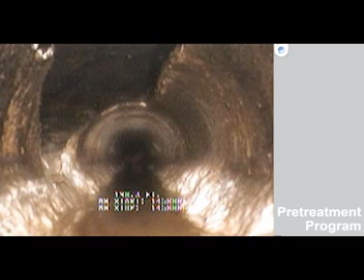In addition, we had a bout with bioslime, and I don't know if anyone on the call has dealt with that, but it's a very interesting thing to try to track down. You can see this slimy goo that is in the sewer pipe, which posed problems throughout the collection system.

I actually worked second shift because I was studying engineering during the day in school, and I drove into the facility one afternoon, and I could not drive past the aeration basins because they had foamed so much and overflowed all of the basins that there was just foam all around. I had to park and walk around to get into the laboratory to try to help figure out what was going on and what we could do.

So some substantial issues with influent. Most of the facilities cleaned on Friday evenings, and so we would get hit on the weekends, which posed a problem obviously for the biology, because they would feast on the weekend and then starve the rest of the week.

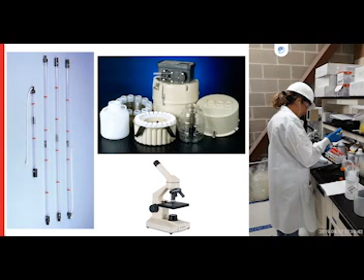Utilizing those tools, the first case study I'd like to talk about is a dairy. This particular client, I had worked at 4 of their facilities, and they were proposing a brand new facility. It was a mix of products that they did not make at any of the other facilities. All of their other facilities had both dairy wastewater as well as non-dairy wastewater, and they didn't have one that was 100% dairy, and they didn't have one that had a profile of the milk products all the way from fat-free to whipping cream.

So what I suggested was that we send off some of the product to the lab and have some laboratory testing completed to try to determine what the wastewater was going to look like so that we could design a system to treat that wastewater.

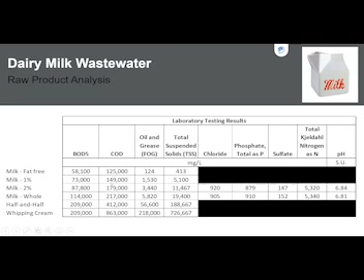So we ran a variety of constituents on the different products, and from that we were able to put together a calculator, essentially, that took what they thought their production volumes would be, the percentage of those volumes, and then we could calculate a weighted estimate of the constituents in the wastewater based on those production volumes. So we could change these parameters.

We could also then change what we thought the percent loss would be in the product. So when they do CIP, they have a certain amount that stays in the equipment and in the lines that goes with the wastewater down the drain, and they can estimate that based on current operation, or obviously they have a goal, a key performance indicator, to try to sell and package as much product as possible.

So we entered this percentage, and then it would calculate the estimated wastewater concentrations on an average and on a maximum. For this particular municipality that was receiving this wastewater, they had some pretty lenient regulations on TSS and BOD. Obviously, you paid surcharges associated with those, but the TSS limit was 7,200 and the BOD limit was 11,000, but the oil and grease limit was 500.

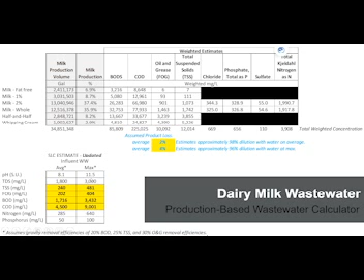So what we ultimately recommended that they do is install 3 equalization tanks in parallel, and they would fill the tank one tank at a time and allow for that 1 hour to 30-minute separation, and then pull off the supernate from that tank as the effluent.

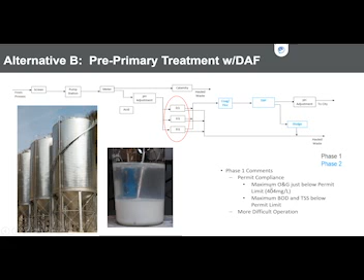As I indicated, this would be in that compliance level, but more difficult to operate, of course. We did an analysis based on the capital costs associated with the project, and then the potential savings associated with surcharges with BOD, suspended solids, and the oil and grease issue. And so they could save almost $600,000 a year with this recommended alternative B.

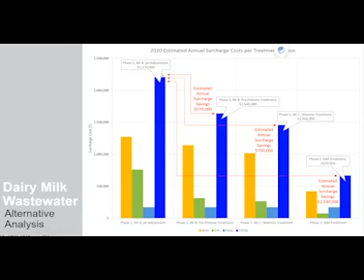But we'd also looked at no treatment at all, the pre-primary treatment as I had described, and then a little bit further treatment, either skimmer or DAF. The client unfortunately chose phase 1 with just pH adjustment and assumed that those percent losses they were going to be able to hold on to, not reach that 4% loss, and be able to stay below that 500 milligram per liter oil and grease limit. Unfortunately, that was not the case.

If we would have used the lab estimates based on the actual product loss that we saw at the other facilities, which is more like 4 to 10% product loss, we would have been at about 140%. With the lab estimates of 2% and 4%, we were about 75% of the actual.

So they ended up having a maximum of 994, obviously out of compliance, and average of 358. So if I use the calculator again and look at what numbers should we have taken a look at, it was just a little bit above 2, so between 2 and 3, and then about 7% product loss. So we should have been a little bit higher on that maximum end.

As I'd indicated, they are having to put in another treatment process to obviously remain in compliance. And because they ultimately ended up with a large 400,000 gallon tank instead of 3 smaller tanks, they will not be able to use the laboratory method that we had tested.

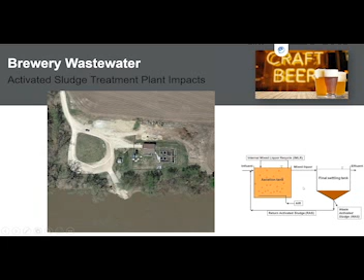So they were getting some high loading associated with something, and it was dropping the DO in the aeration basin substantially and causing some biological disruption. So I put in the discrete sampler.

We did individual samples every hour for 24 hours. And when I came back the next day, I opened up the lid to the sampler and it smelled just like beer. So I asked the operators, do you have a brewery online? And they were not aware of a brewery being online.

So what had happened is a small craft brewery had decided to operate a bottling facility in a strip mall, and the wastewater treatment plant was not alerted. I think that the folks that had approved the operation were convinced that it wouldn't be any substantial wastewater, and that there wasn't any real reason to alert the wastewater treatment plant because it was just beer.

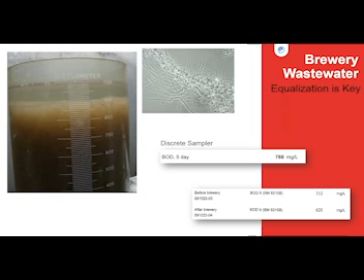So we did another test run and proved that above the brewery it was 312, and downstream of the brewery it was 620. So they eventually did put in equalization, and the plant was able to operate. Like I indicated, the bugs don't mind beer as long as they get it at an even rate. They like to be just a little bit drunk all the time instead of really drunk with a big hangover.

Robert Smith dove into some of the recoverable resources associated with the brewery waste, and other things to consider are super high nitrogen levels and phosphorus levels. We did see substantially high nitrogen and phosphorus in these samples. They weren't limited on those at this facility, so it wasn't a permit issue, but that's obviously something to think about.

And the way that the brewery operates their system, a lot of these things can be stored on site and utilized, whether for farmer feed or other applications.

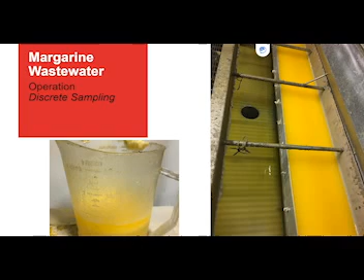So in working with the engineers and the client, I had evaluated the equalization capacity, the existing equalization capacity, and determined that they really didn't need to do any downstream upgrades as long as they provided adequate equalization. They only ran the facility based on the equalization tank levels, and the tank levels only peaked during CIP on Friday. So if we could store the wastewater, we had plenty of time during the week to run that wastewater through the system, given those downtimes. They promised me they were going to only produce a maximum of 6,000 gallons a day, 5 days a week. So they came up with putting in a 30,000 gallon equalization tank to hold that flow and bleed it into the existing system for operation.

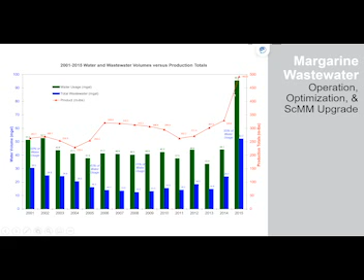So this tracks the water usage with the total wastewater that goes down the drain and the amount of product that's produced. You can see that we were really hovering around 30 to 40% of the water used went down the drain, and we went substantially higher. So 55% of the water went down the drain, and a substantial increase in the water usage, very substantial increase in the water usage.

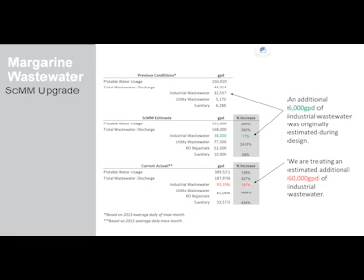So the original thought was 6,000 gallons per day. In actuality, there was 38,000 gallons, or originally that it was going to be a 17% increase. In actuality, it was more like 60,000 gallons a day, so 10 times the amount of wastewater that they had planned to send was sent to the facility. So about a 200% increase in what the industrial wastewater treatment system was required to treat. So it is amazing that it only had 3 violations based on an additional 60,000 gallons per day.

So I just want to stress the importance of working with the industry when they indicate that they're going to do a plant expansion, to be realistic in what to expect, and certainly input from the pre-treatment coordinators on how much detail needs to go into that is really crucial. It can be the difference between compliance and non-compliance, and certainly issues downstream at a municipal wastewater treatment plant.

But in this facility, they have a couple of waste streams that are valuable. So the oil and grease that's removed from margarine can be sold on the yellow grease market, on the commodities market, to go into a variety of products. Being able to capture that wastewater and design a system that allows it to be approximately upward 60% oil, ideally 80% oil if you can get it to that, using a heated tank and gravity separation, you can usually get it into that 60, 70, 80% oil range. It can be very, very valuable.

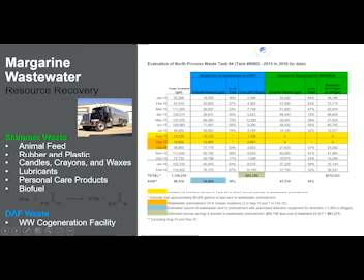And then, like I said, the DAF waste going to the cogen facility, they still do have to pay for it. These numbers are a little bit old from 2015, but they still do have to pay for the DAF waste going to cogen, but they can make anywhere from 71 cents to $1.96 in 2015 dollars on their rendered skimmed waste. And for this particular year, $570,000 in revenue - a real substantial revenue stream for a margarine manufacturer.

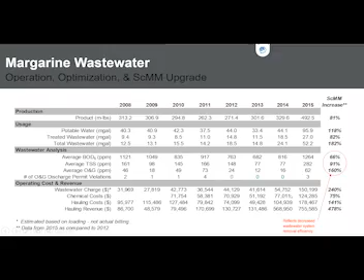And I think on this, yeah, you can see the revenue streams here. So 50,000, 80,000, and then boom, they went up substantially by doing some changes to the way that they were dealing with the oil. So something to think about.

So just in summary, EQ, EQ, EQ. If you can talk any industry into anything, make it EQ and make it big.

And there are a couple ways to think about equalization. You can think about it as an empty tank all the time, or you can think about it as a semi-full tank all the time. And you can think of it as mixed and non-mixed. So there's certainly some options there.

And what's nice about these, if folks haven't used them very often, is that you can see when you're getting flow, how that flow differs, and then if you're not getting flow. So this particular site only had intermittent flow, so we could say when it was operating, and we were actually looking at flow characteristics versus concentration.

The other thing is that operations is the key. If you have good guys and gals working at the facility that are happy to work with you and happy to maintain things, and keeping a very transparent relationship with the regulatory agency, it's just key in making sure that both parties are happy and that systems are operating well.

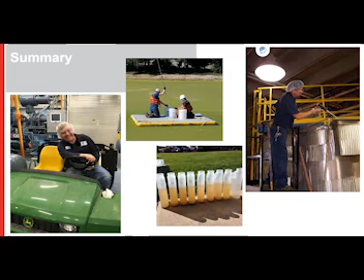So I think I got done in a time frame that gets us back on track. I'm sorry that we got delayed with regards to the video. Oh, no worries. We got a late start anyway, Stacy.

We're still seeing it in presenter mode. Yeah, let me go over here. Let's see. I've got it, let me bring this one over. That's a problem with doing two screens, I guess, huh? Yeah, most of the folks that have joined us have had to work through this as well, so you're not alone. All right, we're all pretty new to virtual presentations. So let me see here, let's see.

Unless I'm just being... display settings. If you hit swap under...

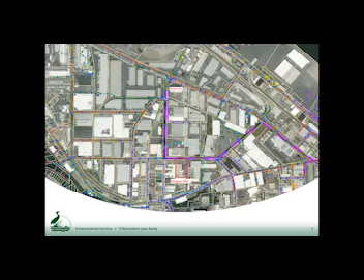Okay, so some background on Oregon Oils. They began in 2011. I started with BES in late 2016, so it already had a lot of history behind it. At the time they had about 20 employees. Their main operations included used cooking oil collection, so they would collect that used cooking oil from fryers primarily, and bring it back. It didn't really collect too many solids, but any solids and water would be removed and then sold to biodiesel manufacturers in the area.

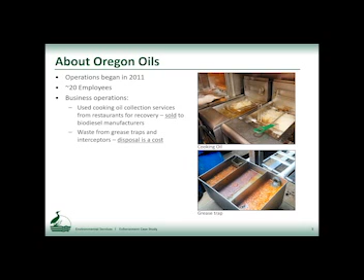Another business operation of theirs was collecting waste from grease removal devices, and this was at a cost to them because they had to treat it for solids and remove water, and then it was discharged to a combined sewer system under the permit, which was issued in April of 2012. So they were issued a significant industrial user wastewater discharge permit, and it really wasn't because of their volume, because they were discharging about 10,000 gallons per day or less. It was really because of their potential to discharge the solid viscous material and cause obstruction in the sewer.

So that permit had requirements to treat wastewater for pH and oil and grease, and discharge of solid viscous substances that obstruct the sewer is a prohibited discharge per city code. We also had a temperature limitation of 149 degrees Fahrenheit.

They're part of something called the Preferred Pumper Program, a regional program with specific standards for cleaning out grease traps and interceptors, and reporting all their information to the program to be on a list of good businesses in the area that perform this work.

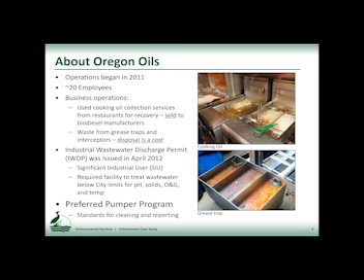Here are just some examples. This is a cooking fryer you've probably seen before, and this is a small grease trap, so this is what they would be removing.

Okay, some compliance history. I know these are distracting, I'll get to those in a second. I started in 2016, but it already had some history behind it. From 2011 to 2013, they just had one pH violation and one late report, which is pretty standard for that amount of time.

In 2014, they started seeing FOG issues - fats, oils, and grease - at the Yeon Pump Station. They did some CCTV work and found that FOG was coming from the lateral right outside Oregon Oils.

Here's an image of what that FOG looked like, I think in the effluent well of the Yeon Pump Station. I wish I could show the video because it was completely sludgy - unlike anything I've ever seen or smelled before.

So they were issued a notice of violation, $1,800 for that prohibited discharge of FOG. And they were issued a compliance order to cease those discharges and improve treatment.

Once they improved treatment and ceased those discharges, in 2016 the problem came back. So we did the same thing - we issued another NOV and another CO to cease those discharges of FOG, and we also required an engineering analysis of the treatment system, with treatment to be improved depending on that report.

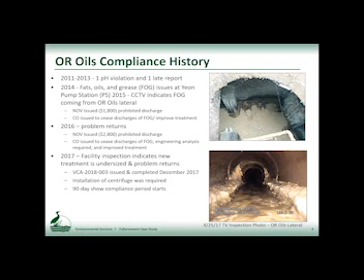Here's right outside their lateral, you can see the gunk built up. About 36% of you said FOG was a major issue, and this is just what it does - it clogs the sewer lines and can cause major interferences with the treatment system.

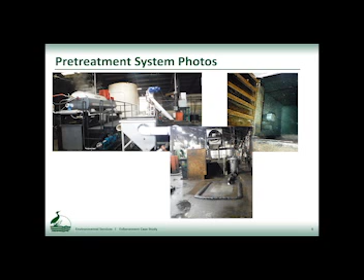It should be noted that prior to this point, all of these connections could be modified to their liking because they were flexible hosing and not fixed pipes. So that was also a concern for us.

With that permit renewal I mentioned in 2017, we used that as an opportunity to add more stringent permit requirements. One of them was they were required to install a monitoring access structure.

That basically makes our sampling point representative, safe, and secure. Secure meaning either in a below ground manhole or sampling vault, or it would be enclosed by something like a 3x3x3 box with a lock on it. So if we were to hook up a composite sampler, it would make it harder to tamper with.

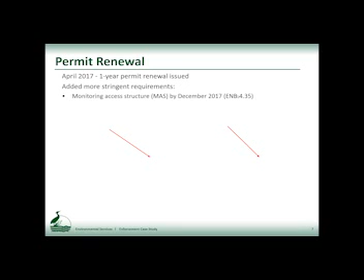You can find those rules. Just look up Administrative Rule ENB 4.35 if you want to see all the requirements.

Another requirement we added to the permit was to notify us of each batch discharge. Instead of discharging daily, we wanted them to retain their wastewater and then give us a 48-hour notification via email indicating volume, time and date, and a contact. So field ops, our sampling crew, could go through the emails and pick a date that works for them to go out and sample.

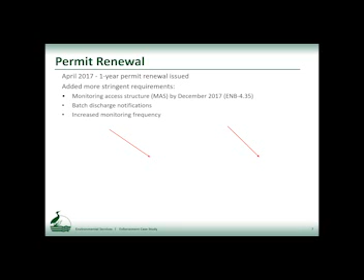Another thing is we increased monitoring on both the city side and the self-monitoring side. I started taking a closer look at their analytical results, and this was sort of what I was seeing.

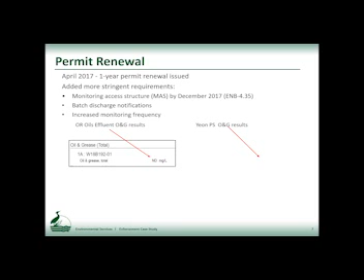Our effluent yielded non-detects every time, and that was an immediate red flag, because there were industries in Portland with more robust treatment systems that were getting detections. So it's really a point for you to look closer at the analytical data. I compared that to the sample we collected from Yeon Pump Station, and it was many, many times higher. You can see it was broken up between non-polar and total oil and grease, and it was significantly mainly polar grease, which would be from those vegetable oils and the grease trap waste, rather than petroleum-based waste.

Once they installed treatment, and once everything was nearing completion of their voluntary compliance agreement, we decided to essentially give them a fresh start.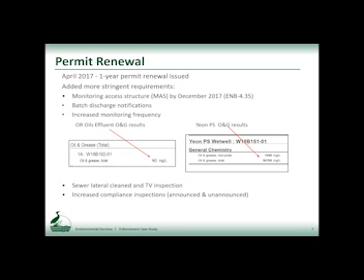We ended up cleaning the sewer lateral and doing another TV inspection to verify the cleaning. And then I increased my compliance inspections, both unannounced and announced, throughout that entire period, especially when they were completing portions of the VCA.

So that VCA ended in December of 2017. Sorry, I'm throwing a lot of dates at you, but the timeline's pretty important. There were a lot of moving pieces. So the VCA ended, and that 90-day show compliance period starts.

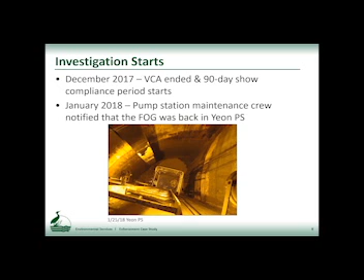So we decided, okay, it's most likely Oregon Oils, but maybe there's another IU out there. So we started an investigation starting at Yeon Pump Station and working our way back upstream to see if maybe we were missing something.

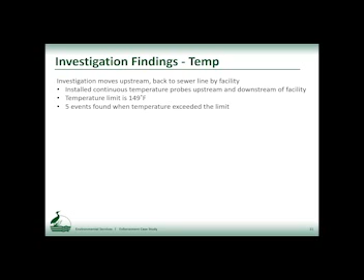All right, so moving back upstream to the sewer line right in front of Oregon Oils, we decided to also install the game cameras and temperature probes upstream and downstream. We found that temperature exceeded the 149 degree limit 5 times on the downstream probe. So here are those 5 events.

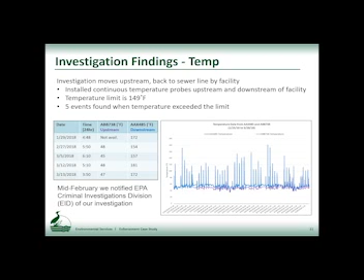It should be noted, around the 2nd week of February, we knew there had to have been some sort of illicit discharges going on, especially since we weren't getting those batch discharge notifications as required by their permit. So we decided to let the EPA Criminal Investigations Division know. About mid-February, we let them know what we were doing, and they said keep doing it, gather more data and provide it to us. We'll work on getting a warrant to maybe do a raid of the facility.

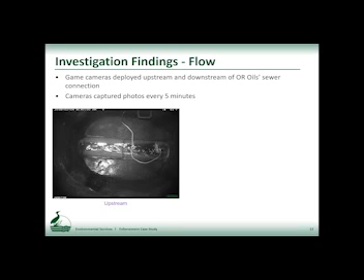So we continued our investigation, and what we found was the game cameras deployed upstream and downstream showed a significant difference. Here's upstream, here's the temperature probe, and it pretty much looked like this at all times - a very, very low flow. That combined sewer sort of dead-ended at that end of the street, so there wasn't really a lot of influx of wastewater upstream. This is pretty much how it looked like all the time. But then downstream, right after Oregon Oils at that downstream manhole, you saw just that influx of discolored material, and you can see the lenses sort of condensating from the heat.

So we needed to confirm that wastewater contained oil and grease just to give us more evidence. We deployed these ISCO composite samplers, and put them both upstream and downstream to gather comparisons. We set the programmer to pull between 3:30 and 7 a.m., which is typically when we saw that discolored wastewater - that's typically when we saw its discharge.

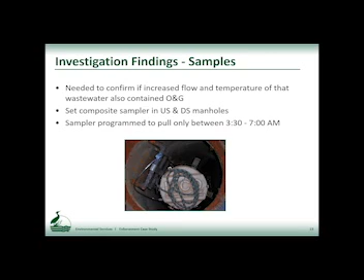And from Stacy's presentation earlier, 3,000 was actually the oil and grease concentration of half and half. So that's pretty significant to be directly discharged to our system.

So here's just an example - sorry to gross you guys out, but here's a sample that we collected from Yeon Pump Station. You can just see that it's a solid, essentially. This is so thick and completely interfered with our pump station, requiring a lot of work on the pump station maintenance crew's part to go through and clean it out.

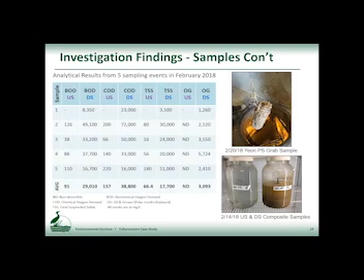All right, so summarizing everything we found: it discharged between 3:30 and 7. We correlated that with temperature spikes, elevated volume, and those discolored discharges, and found that it also correlated with the elevated pollutant results. Another note is our pump station maintenance crew, we call them PUMA, had to go out 1 to 2 times per week to Yeon Pump Station to clean it out, which was about 4 times higher than they had to do with any other pump station in the area.

And they kept logs, and this one was just kind of the highlight for me - it says they flushed sides A and B, and said the goo was back, which was also an indication that it was causing interference.

So all this physical evidence really supported the claims that they were discharging in the early morning without submitting those discharge notifications to us. And that means that their self-monitoring reports, which summarized the batch discharge notifications and analytical data, were falsified, and mis-stated in order to inaccurately charge their discharge volume.

So normally, I'll just back up a second. Normally, someone would be charged their sewer based off of their incoming flow - it would be in and out, because like 99% of what you use is just charged back to the sanitary system. So they use that sewer volume. But since they were bringing all this waste in, the out would be several times higher than the incoming flows.

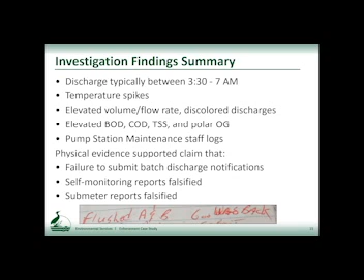All right, so at the same time during this, it went on so long really because the criminal investigation side needed more data to have enough information to obtain a warrant. So we kept it going until about April. It started late January through April.

And we kept them up to date on our investigation findings. So EPA CID, the Criminal Investigations Division, worked with Oregon State Police in obtaining that warrant.

And we met with them - we started a 5 a.m. briefing on April 19th, so it was EPA CID, Oregon State Police, and BES staff. So it was Dan, my manager, myself, a couple of field operations crew members, and then those two groups.

So we briefed for about an hour, and then we waited outside their facility essentially, and I didn't have a vest or anything, but the CID and state police ended up raiding the facility first at 6 or a little bit prior to 6. They presented their search warrant and immediately started interviewing employees and seizing computer files, hard files, phones - just for information on these illicit discharges.

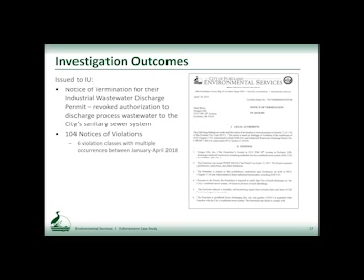So this is just a snapshot of what that looked like. And then later, I decided to go home because that had been a very long day. Later, I ended up writing 104 notices of violations. They were broken up into 6 different classes, each with multiple occurrences in just that investigation period.

I guess we could have elaborated and gone back a couple years, but we thought it would build a more solid case if it was just that investigation period.

And then on the extra strength and sewer charge side, we have an extra strength and sewer charge group, a separate group, and they did a billing adjustment for those January to April findings. I'll go through that in a second.

So here is the enforcement and penalty summary. Those are those 6 different categories. So they discharged without the batch discharge notification as required by their permit, and that happened 41 times in that time period. We also found those 5 temperature exceedances, which were just general discharge prohibitions in our code.

We counted 40 times of discharge of solid viscous material during a voluntary compliance agreement. And we counted 11 times of pump station interference, meaning the pump station crew had to go out and clean the pump station 11 times.

It should be noted that these three at the bottom were just capped out because our code says we can only assess a civil penalty of up to $10,000 per day for each violation. So these would have been higher.

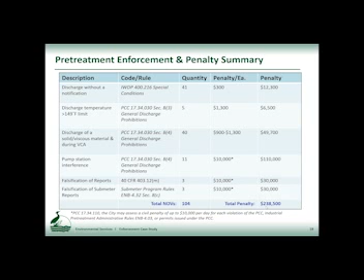And that was just the pretreatment side. The extra strength side was quite different. So we conservatively estimated the flow with Manning's equation, which estimates the flow rate in an open channel pipe using the wetted surface area and change in height, and also takes into effect the roughness of the pipe.

So we actually calculated it to be about 32,000 gallons on average per discharge event. And some more calculations to calculate average BOD rates on the discharge ended up being 227,000. And then the average TSS rate we calculated for the discharge was 187,000.

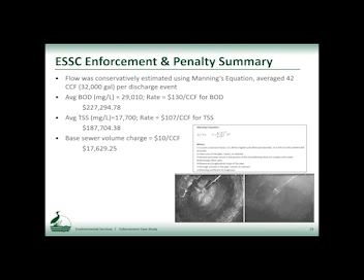And just on the base sewer volume charge, like what any industrial or commercial user would pay on their sewer charge, was an additional 17,000. So the extra strength side was 432,600. That makes the grand total 671,000 for pretreatment and extra strength.

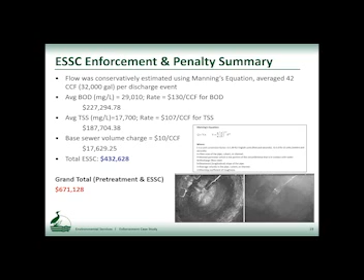So at the same time we were doing our civil enforcements, they were also conducting their criminal enforcements. Note that we just enforce city code, our admin rules, and those wastewater discharge permits, while the Department of Justice works with EPA on conducting those criminal enforcements.

And what ended up happening with them, Oregon Oils actually pled guilty to Oregon State Police and EPA. The owner was charged with two misdemeanor charges to the second degree of water pollution under this code, and they were sentenced to two years of probation.

Unfortunately, on our side, they requested an admin review on the extra strength charges and violations we issued. We ended up issuing them a settlement agreement, which included another voluntary compliance agreement, and we agreed to reducing the extra strength charges by 132,000.

So the revised total civil penalty between our two groups was 538,000, and that was going to be split between two payments. So they accepted the new voluntary compliance agreement conditions.

So it essentially said this: we revoked their wastewater discharge permit, and the VCA we issued afterwards said you're going to refrain from discharging. You're actually prohibited from discharging until another permit is issued, and until that's done, you have to provide documentation to us.

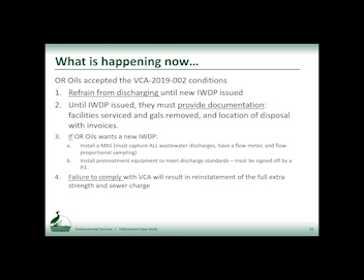Okay, so definitely I was pretty new, about two years in, and I definitely gained a lot of experience. This was my first investigation, and what I found was...

Just thoroughly review the analytical data. It was a big red flag to see that they were getting non-detects for an industry that doesn't have a perfectly well operated treatment system, if at all. Industries in the same sector with more robust treatment were actually getting detections between 10 and 50 milligrams per liter of oil and grease. So it just didn't add up to me.

And then modify permits to add those more stringent requirements. We got kind of lucky that it was a permit renewal, but there should be some language in your code or rules that allow you to modify permits. And then explore different investigation techniques.

We did order the game cameras, and that was actually super helpful, especially with calculating the extra strength results. And then just make sure you have continuous monitoring equipment on hand, because you don't know when there's going to be a bad actor like this and you have to start some investigation work. And then, yeah, just sample. There's probably some more things I learned from here, but those were the main ones.

They were trying to save a significant amount of money on their sewer and extra strength costs, so there was incentive for them to bypass their treatment system and their flow meter.

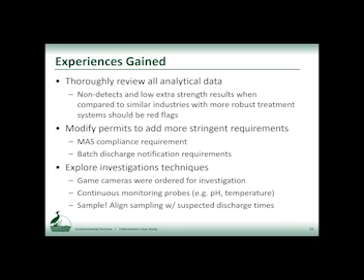Definitely a team effort, there was a lot of coordination in this project. I'm in pre-treatment, and this was my IU, and definitely worked with FOG, and then some investigation techniques from some other groups, and field operations and the lab were super helpful in just sampling and analyzing on a moment's whim. And then definitely worked with the city attorney when that admin review was called, and developed a better relationship with the pump station maintenance crew, because they can let you know if they're seeing something weird in a pump station or collection system, just keeping that line of communication open. And then it was great getting experience working with EPA and Oregon State Police, Department of Justice on their criminal side of things, so that was new to me as well.

Anyway, thank you all for listening. If you have any questions, I'll be happy to answer them.

Sorry about that, I'm having technical issues today, guys. So thanks, Brittany, are you still there? Yeah, I'm still here, can anyone hear me? Okay, great.

We do have a few questions for you, Brittany, if you have some time. Uh-huh, okay. Let's see, we'll try to start at the top. Okay.

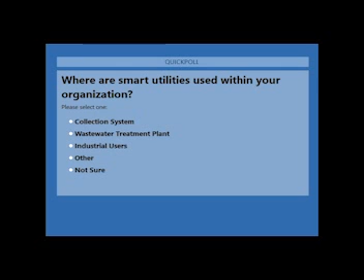Our program's so big, we break up who does the sampling and who does the inspections and compliance. So on pretreatment, we kind of keep those separate. And with the game camera, it's just a normal game camera you would buy for hunting.

Do you consider those disposable, or are you able to use them? No, we were able to reuse them.

Someone asked who required the centrifuge to be installed. They noted that it seemed unusual for a pretreatment coordinator or pretreatment staff to specify a type of treatment. If I had more time, I would have elaborated a bit more on that, but they did submit another engineering report and pretreatment plan, and the plan included installation of a centrifuge. We approved the plan since it said it would remove oils and solids to 99%. So we just certified their plan.

As part of the VCAs, did Portland design the pretreatment system, or did the permittee? Oh, you just answered that with the engineering report. In our area, they're required to submit an engineering report, and that's what's reviewed and approved.

Well, welcome, Charlie and Gene. Thanks for your time today. Can you hear me? I can hear you now. Yay, all right, can you hear me? Yes, I can hear you. I'm here, greetings. Let's see, display settings.

Nope, that's not what we wanted. It's a little unusual, we can see your GoToWebinar box, which I don't think we've been able to see from any of the other presenters who have shared their screen. Usually that's hidden. How's that? We're seeing it in presenter mode, or display, so where you had it before, to swap to, yep, that should give it to us. And there you go, all right, perfect.

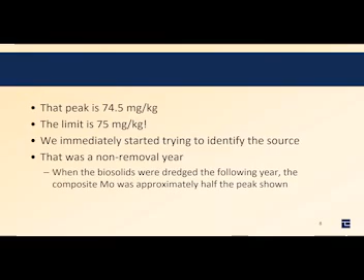We looked at sources inside the plant to start with, and luckily this was a non-removal year - we do an annual or every-2-year removal of our biosolids. So when we dredged the following year, the composite molybdenum was about half the peak shown, in the 40s. So we evidently hit a hot spot when sampling that year. Our operations staff proceeded to sample in quadrants from that inventory, that particular removal. I believe they sampled about 48 times, and we did not get any more hits during that, so we were able to apply that batch.

Our treatment plant is a combined trickling filter and solids contact plant and an aerated facultative lagoon system. Our rated flow is 40.3, our average is 19.3, but we tend to peak at over 100 million gallons per day. The mechanical plant has an average flow of just under 10 and a maximum of 15, and anything more than that is either discharged from the lagoon system or stored.

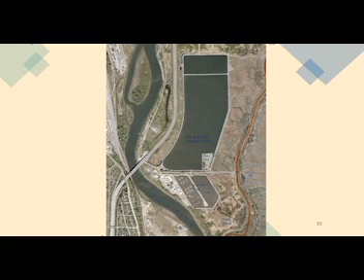The biosolids removals are done from the aeration cell on the right at the bottom of the picture. That's where we store and digest our solids.

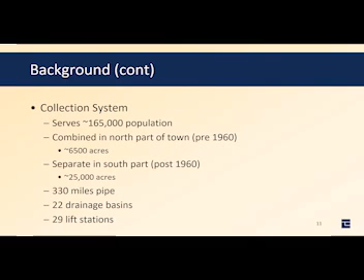Our collection system serves about 165,000 people. The north end of town, where the sewer system was built pre-1960, is combined, about 6,500 acres. The south is separate. We have about 330 miles of pipe, 22 drainage basins, and 29 lift stations. So we've got a fairly extensive system.

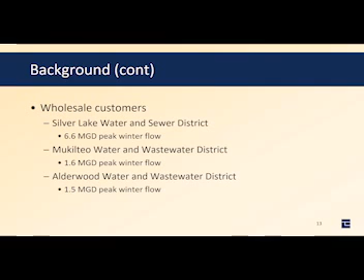Silver Lake gives us a peak of 6.6. We treat essentially all of their sewage. Mukilteo, a very small portion, 1.6 MGD, and Alderwood Water and Wastewater, 1.5 MGD peak. They have their own treatment plant, plus they discharge to King County Metro.

And correct me if I'm wrong, Gene, but I believe Silver Lake represents about a third of our average daily flow to the plant. Yeah, about that. Okay, and now I'll turn it over to Charles, and we'll talk about how we've tried to find our molybdenum.

Thank you, Gene, and thank everyone for attending. As everything is this year, it's a little bizarre, and I think Andrea and Raul and everyone has done a great job with this. I am humbled, and I learn a lot with these, and it makes me realize, although I've spent nearly 60% of my life in wastewater and water quality, that I have a lot to learn still.

So as Gene said, I want to cover this part, and molybdenum is one of those things I never honestly thought about. I just remember it being one of the hardest things on the periodic chart to pronounce, and so this has been really interesting. I will have to say ahead of time that this is sort of like one of those TV shows where they get to the end of the season and you're excited, and then you realize it's going to be a 2-parter, and you have to wait until next season to find out what happens. That's kind of the way this is going for us.

So initially, we need to look at concentration or loading. We don't have flow data on all the places where we would end up monitoring. So we chose concentration, and the flow metering had limitations, complications. We chose concentration as the parameter that we could manage. We'll add flow data maybe in the future if we have it for appropriate locations.

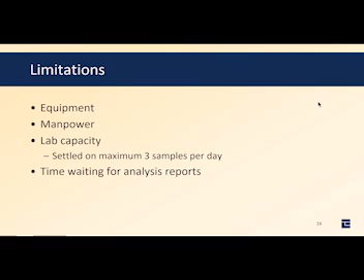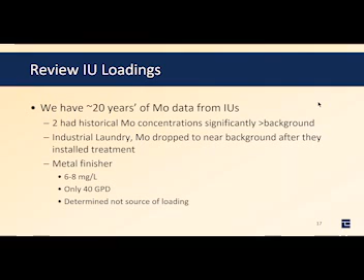So we have a lot of data already. We did have some historical issue with industrial users, a couple, but those were essentially ruled out because they had added treatment, and the metal finisher was not significant at that time. I don't know that that one's still around even, Gene. Yeah, that's Railmakers. Oh, okay. And by the way, both of our industrial laundries do now have treatment as a result of a compliance order a couple years ago. Okay.

And Gene, you just chime in if I'm missing something anytime here. We also looked at our influent loading, lots of that, of course, but unfortunately we only had about 1 sample per day per quarter. The data was not adequate for this kind of an analysis. So we did some influent sampling for 14 days, middle of last year. And we did confirm it was coming in. And as Gene noted, it wasn't generated in the plant from use of, say, moly grease on our aerators. So it wasn't consistent either.

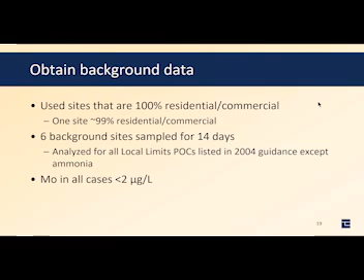But that was our detection at first. And then this kind of dovetails into what Gene will talk about here with local limits, is that we needed to look at background data. So we looked at several sites for 2-week periods, analyzed for local limits purposes primarily, but also looking at Mo. And in all cases, we didn't find much.

So the plant has 2 main input lines, one from the combined area and one from the separate area. We found that the north end influent was at background and apparently not our source. The south end showed slugs approaching 0.6 milligram per liter.

This is the first time we really saw, okay, this is a narrowed down point—not very narrow, because the south end is a very large area. So at this point on, we just switched to looking at metals.

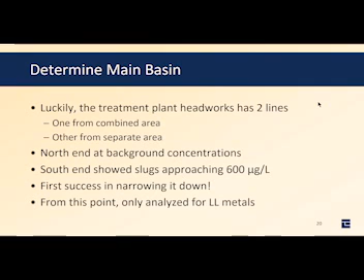So we're sampling at the influent of both the south and north ends. We found it in the south end. And the next step...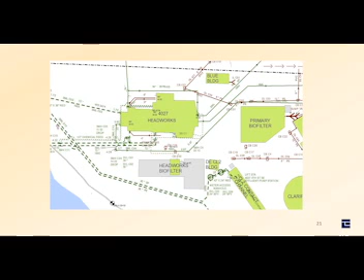Then we look at the first sub-basin, which is the 3 primary lines: the southwest interceptor, central interceptor, and the other interceptor. We sampled these, and one we had eliminated—the south end on the Silver Lake side—because it was one of our background sites.

So at lift station 1, which is our biggest lift station and serves our industrial areas, that's where we had a little bit higher slugs. So we're finding this is the part of town we're looking at. Lift station 1 is kind of near and dear.

Go ahead and go to the next one there, Gene. It's down at the base of a really neat little drive through the woods in Pigeon Creek 1 in Everett—that blue thing in the lower left there. It's along the waterfront, right next to the railroad tracks. I've always loved this site because I feel like I'm someplace different when I go there.

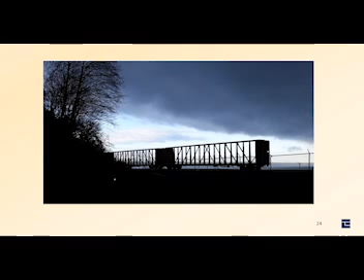Go to the next slide, if you would, Gene. I like to take pictures, as some people know. When we go down there early in the morning, I really like it for just a place—you're in the city, but you're driving through the woods to this neat spot. I'll go ahead and go next, Gene.

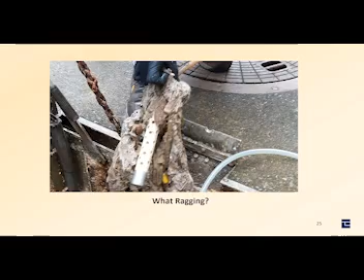Then we looked at subbasins from lift station 1, and we sampled each of these in 2 separate sampling efforts for 2 weeks again. Most of them were near background again. We found one we call the Gardner Vault site that had higher slugs yet. So we seem to be getting closer.

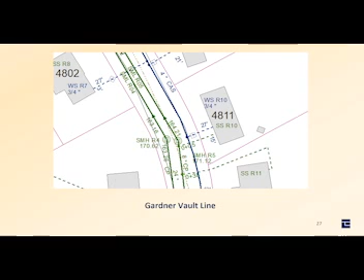Okay, so now we're in the Gardner Vault subbasin, and there are 3 major subbasins. We set up and were going to sample them, and then what happened this year—after the initial shutdown, most of our users were closed. We did not see anything in those.

So that's kind of where we're getting to what would be the last 10 minutes of the Star Trek episode, where everything wraps up—but instead it's more like TV now, where we're at that last episode of this season, and then we will be resuming.

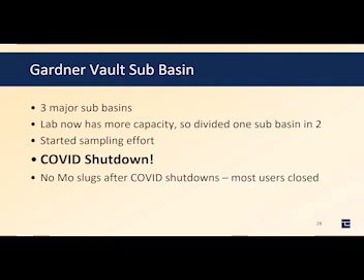We're waiting for some data now. We wrapped up sampling at 4 separate sites with several lots of people back in business. So we're waiting for analysis at this point for these sites, and hopefully it'll give us an indication as to where to go further. Hopefully that'll be our Thanksgiving gift—we'll be getting some of this data so we know where to go next.

And that's where we do the to-be-continued part on our search, because it's not conclusive yet, but hopefully by next year it will be.

A few lessons we learned: you really need your team. You can't just assign something like this to a person. With only 3 of us, we had rotations where we worked weekends, and a couple of us had stretches of 20+ days in a row working.

Trend analysis is really important. This is maybe just my opinion, but I think we need to sample more, and it makes it tougher to do the field work and the analytical work. But I personally think more data is good data, if it is good data.

Enough said about the pandemic. COVID year 1 - let's hope there's not too many more.

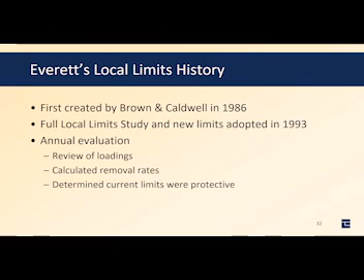Then in 1993, we did a full local limit study and adopted new limits. Since then, we've just been doing annual evaluation of our local limits. We look at loadings, removal rates, and all along we determined that the current limits were protective of the plant, so we weren't required to do another local limit study.

But the errors we made - we weren't doing enough trend analysis. We basically weren't looking at it. And we weren't looking at any constituents that we didn't have current limits for. So those were two problems there.

So why a full local limit study now? Well, it's time - we haven't done one for 27 years. We're going to need a local limit for molybdenum, so may as well do them all. There's new guidance, and I'm updating the ordinance, so it's a good time to do it.

The challenges we faced in doing the local limit study - we didn't have recent background data. Due to manpower problems, we stopped doing the background sampling about 15 years ago. So going forward, we're going to do background sampling every 7 months or so, and that way it'll move throughout the year and give us a supply of data we can use next time we do this.

No one here has done a local limit study in over 30 years. My last one was at a previous employer when I started up their pretreatment program.

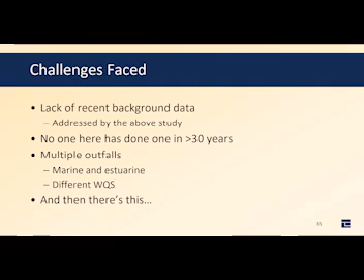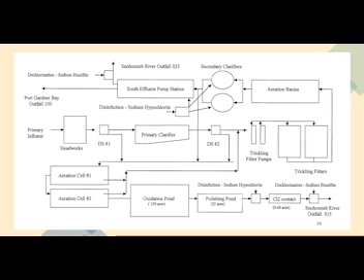It just goes in circles. And they're talking about adding another circle, where it can go from the lagoon system back to the south effluent pump station at the top there and be pumped to our deep water outfall. So our treatment plant is complex.

So with the way our plant's set up, we're using the mean removal efficiency method for calculating everything. Our lagoon system detention times range from 20 to 120 days, so we can't use the other two methods because we can't do paired sampling. It's just not possible. We've got a good quarterly data set for doing the long-term removal efficiency.

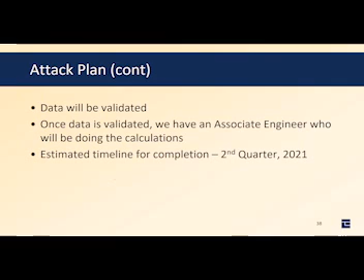Right now we're gathering data for uncontrollable loading. We have one more round of background sampling to do for our wet weather flows, so we'll be doing that in January, and then we'll be doing the calculations. As we continue on, we'll validate the data, see if there's anything that just looks weird. Once it's validated, we have an associate engineer who will be doing our calculations, and we estimate the timeline for completion about second quarter of 2021, which will dovetail well with our timeline for our new ordinance.

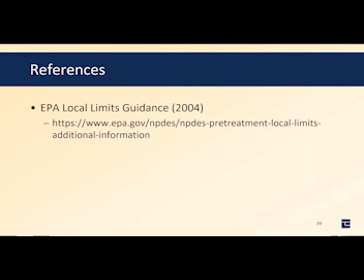And that pretty much concludes our presentation. This is the reference for the EPA local limits guidance. This is a nice update, it made it very good compared to the 1987 or 88 guidance. So we are open for questions now.

Great, wonderful. Thanks, guys. We have a question asking if you guys have a feeling of where this perhaps the molybdenum could be coming from. Where is this coming from?

We're thinking it's probably corrosion control discharge from some kind of HVAC cooling towers, but we're not sure. That area where we're getting it from has a lot of aerospace manufacturing, so it could be a discharge from one of those too. Like I said, we're hoping it's Boeing because that's the easy button.

And I have noticed with a little research that I believe the top five manufacturing uses of molybdenum are metal work, alloys, chemical catalyst use, lubricants, pigments, and fertilizer. I read an article recently about how certain media for 3D printing can have one to two percent molybdenum compounds in them. So I don't know of those, but yes, I hope that, as Gene says, if it traces up to our largest employer, then that might make it easier, but we're not concluding that yet.